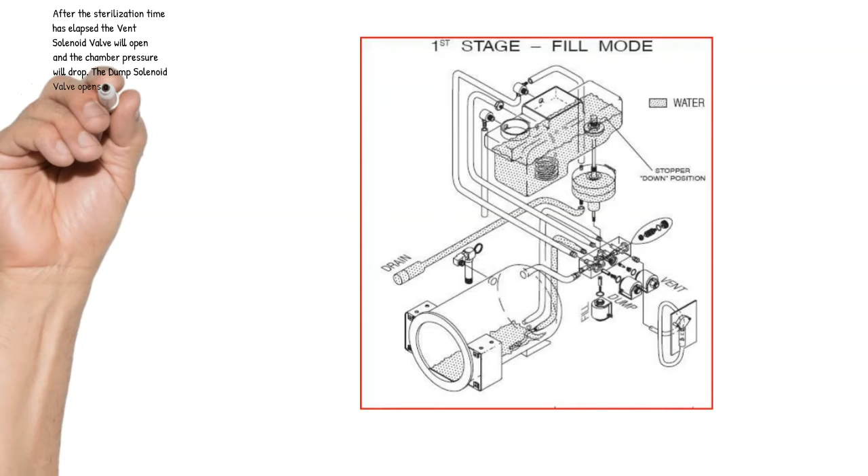After the sterilization time has elapsed, the vent solenoid valve will open and the chamber pressure will drop. The dump solenoid valve opens at approximately 20 kPa, accelerating the pressure drop to zero.

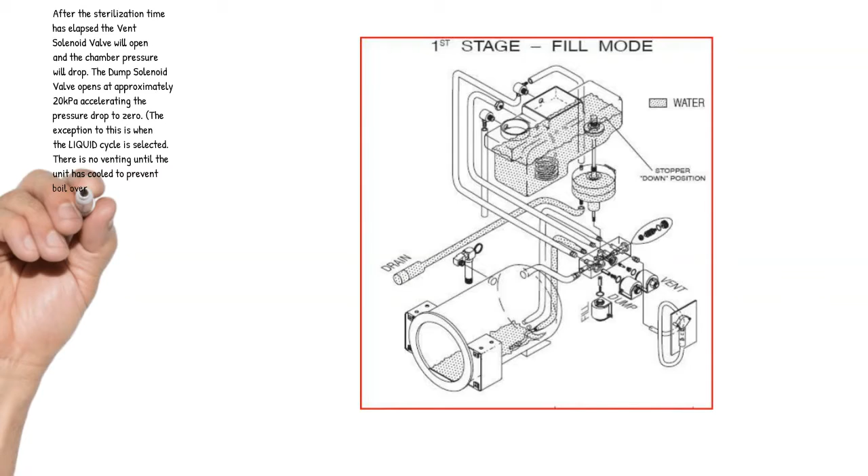The exception to this is when the liquid cycle is selected. There is no venting until the unit has cooled, to prevent boilover from occurring because of the sudden drop in pressure. The next phase is the drying cycle.

A 30-minute period is programmed into the unit to allow for proper drying of a fully loaded sterilizer, with the sterilizer door closed.

To expedite drying, crack the door open approximately 1 inch. Loads should dry in about 5 minutes with the door opened.

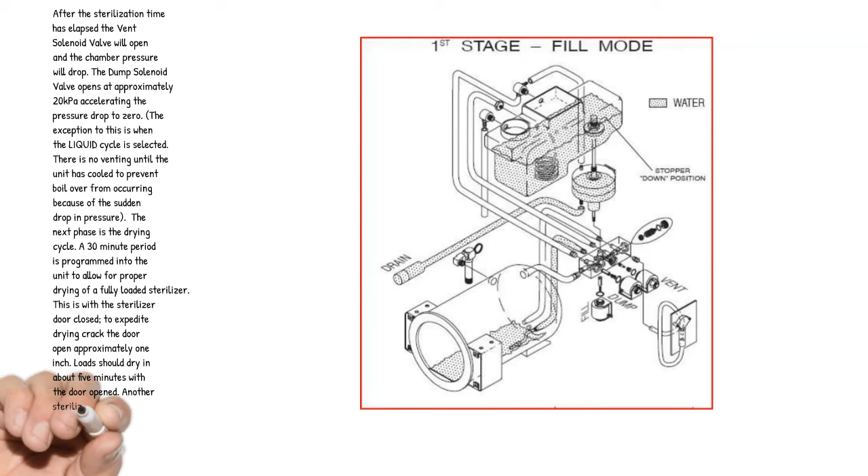Another sterilization cycle is started by depressing clear/start. After the drying cycle is complete, the unit will flash 'end' in the lower display window.

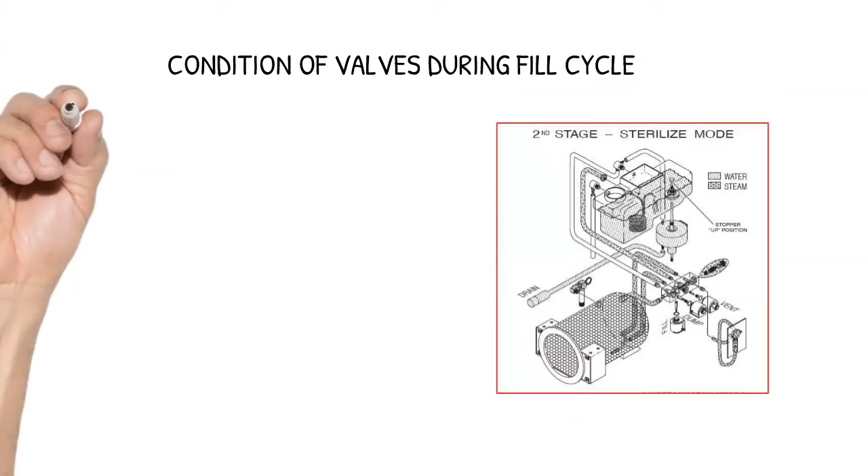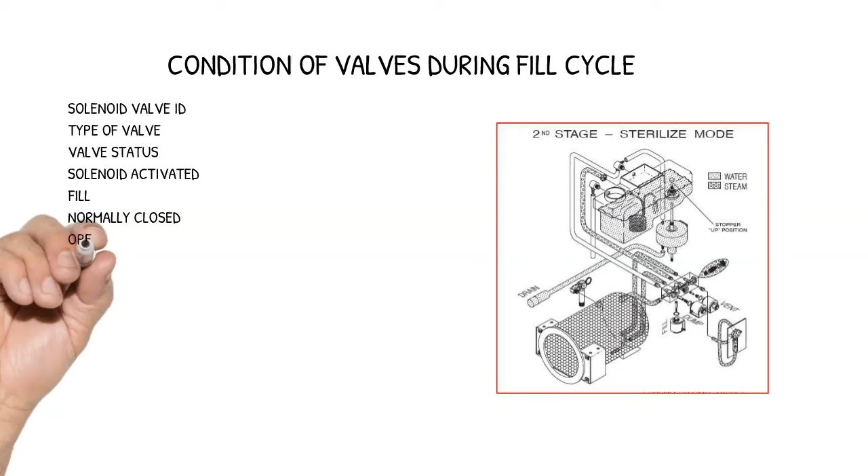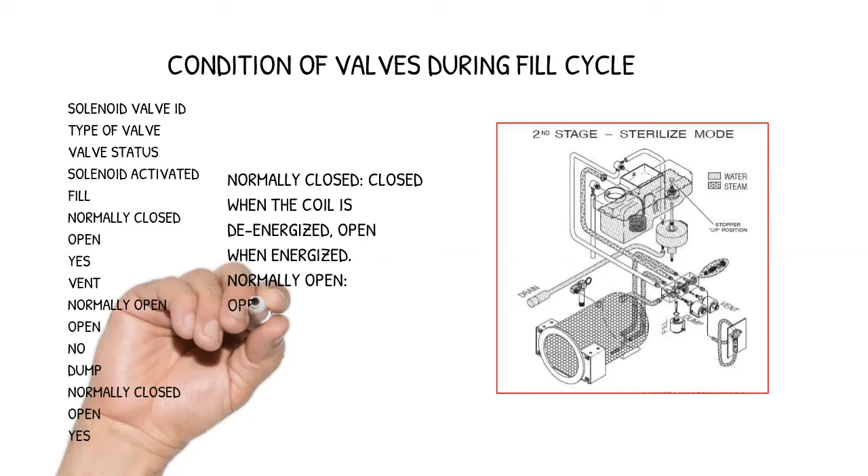Condition of valves during the fill cycle: Solenoid valve ID, type of valve, valve status, and whether the solenoid is activated. Fill valve: normally closed, open, solenoid activated yes. Vent valve: normally open, open, solenoid activated no. Dump valve: normally closed, open, solenoid activated yes. Normally closed valves are closed when the coil is de-energized and open when energized. Normally open valves are open when the coil is de-energized and closed when energized.

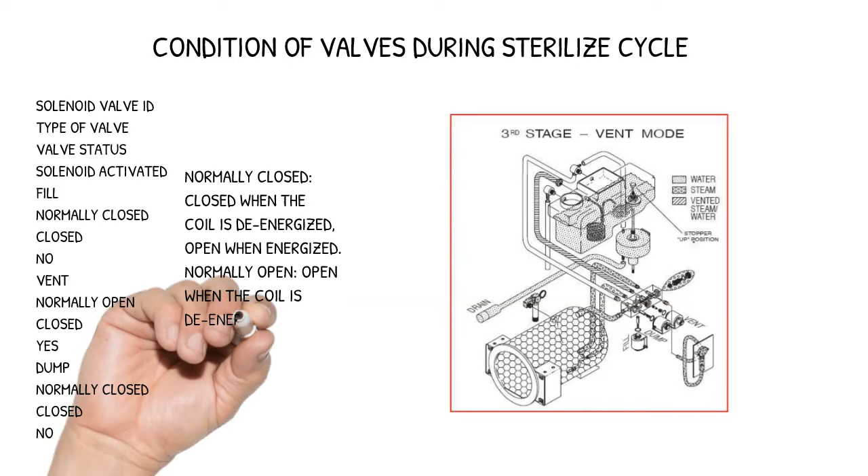Condition of valves during the sterilize cycle: Solenoid valve ID, type of valve, valve status, and whether the solenoid is activated. Fill valve: normally closed, closed, solenoid activated no. Vent valve: normally open, closed, solenoid activated yes. Dump valve: normally closed, closed, solenoid activated no. Normally closed valves are closed when the coil is de-energized and open when energized. Normally open valves are open when the coil is de-energized and closed when energized.

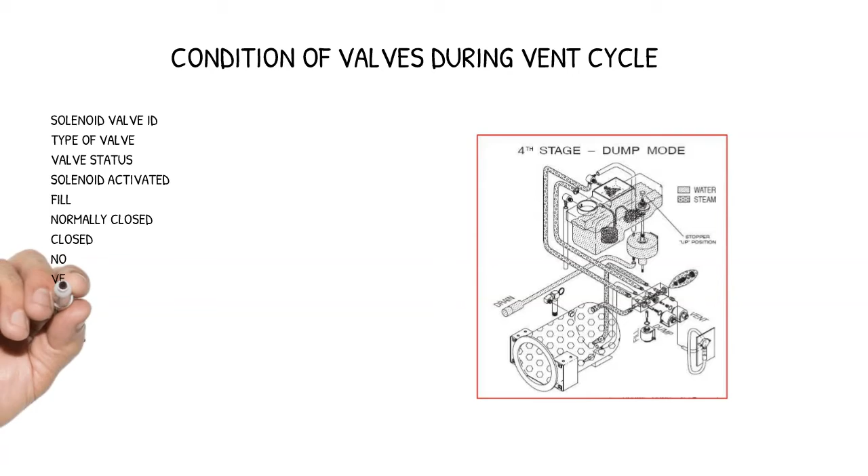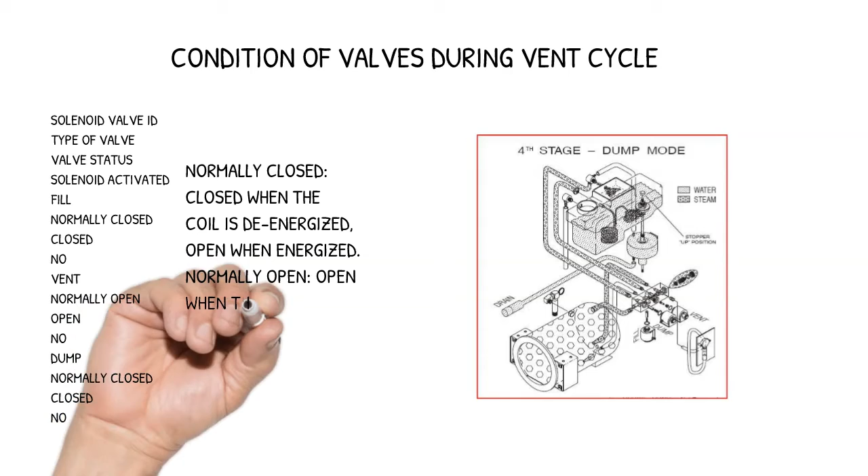Condition of valves during the vent cycle: Solenoid valve ID, type of valve, valve status, and whether the solenoid is activated. Fill valve: normally closed, closed, solenoid activated no. Vent valve: normally open, open, solenoid activated no. Dump valve: normally closed, closed, solenoid activated no. Normally closed valves are closed when the coil is de-energized and open when energized. Normally open valves are open when the coil is de-energized and closed when energized.

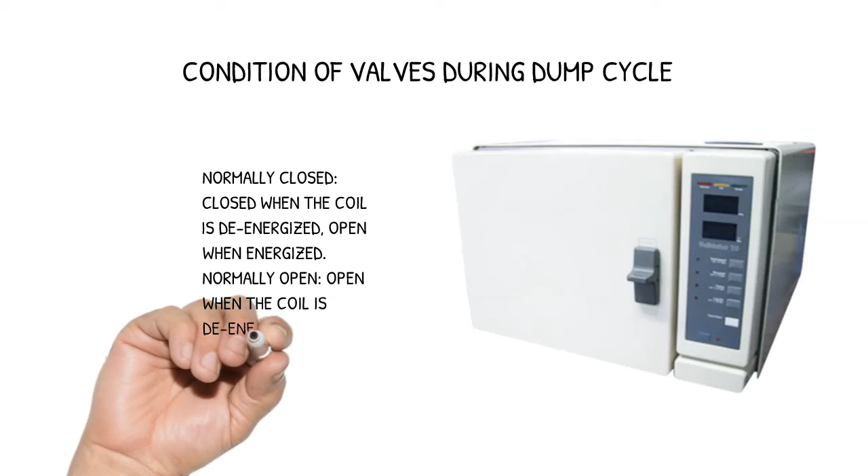Condition of valves during the dump cycle: Solenoid valve ID, type of valve, valve status, and whether the solenoid is activated. Fill valve: normally closed, closed, solenoid activated no. Vent valve: normally open, open, solenoid activated no. Dump valve: normally closed, open, solenoid activated yes at approximately 20 kPa. Normally closed valves are closed when the coil is de-energized and open when energized. Normally open valves are open when the coil is de-energized and closed when energized.